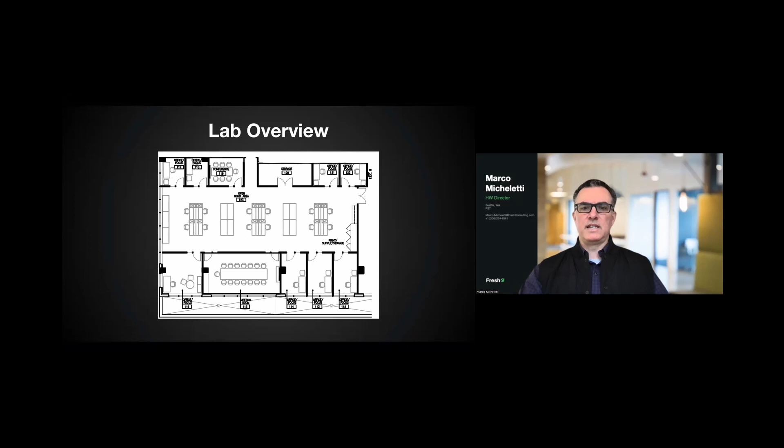Another one of our superpowers is we actually have a lot of capability around fabrication, small prototyping, and building in-house. We have a couple different options between our labs and shops with different capabilities. We have two labs at our headquarters that are about 2,000 square feet each, with benches and things like that. And we have a 10,000 square foot shop across the highway from our headquarters in South Bellevue, which allows us to do some pretty large work, since you need the space when doing mobile robotic integration on vehicle-size products or large automation work cells. So we have a lot of capability in-house, which also differentiates us from other folks in the area.

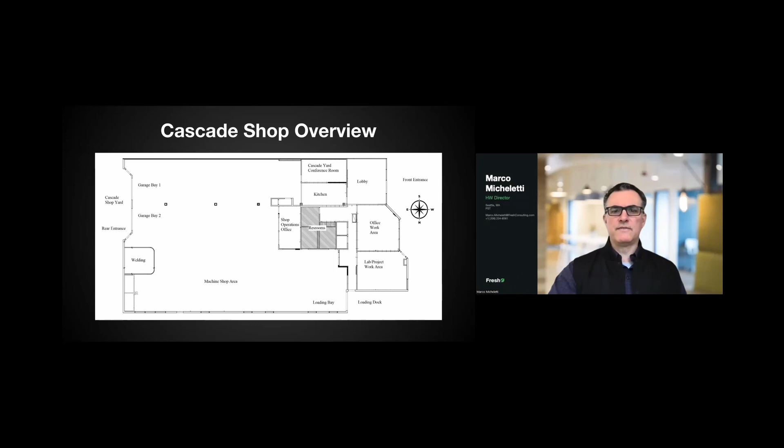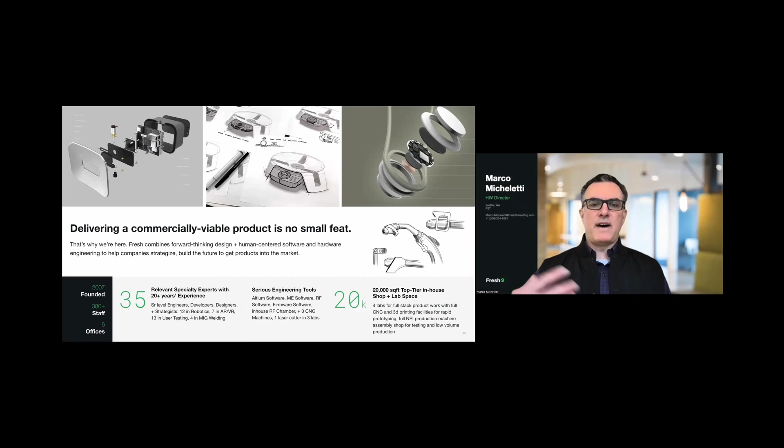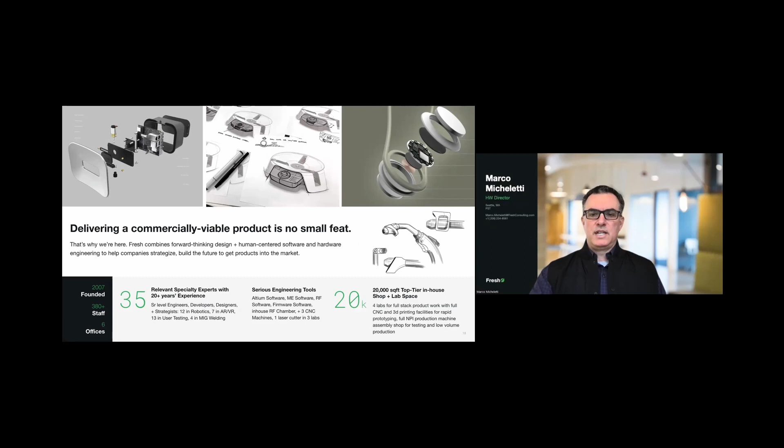So why do we do this? We're really interested in the purpose of product development companies, which is to help our clients bring commercially viable products to market. It's a really hard thing. Everyone's heard hardware is hard, but that's what we are. We're hardware developers with a lot of capability in a lot of different areas. And at heart, almost everybody on our team was that kid who loves to build and tinker and engineer. That's what we are at heart, and we love solving the really hard problems for our clients.

And we follow formal and organized processes around product development. We have some of our product development processes that we show. People have different terminologies for product development processes, but we follow that. We also publish quite a bit in the space of thought leadership, white papers that are on our site, always trying to look around the corner a little bit into the future, to show our clients and anybody interested a bit of thinking around new technologies and challenges going on in the future.

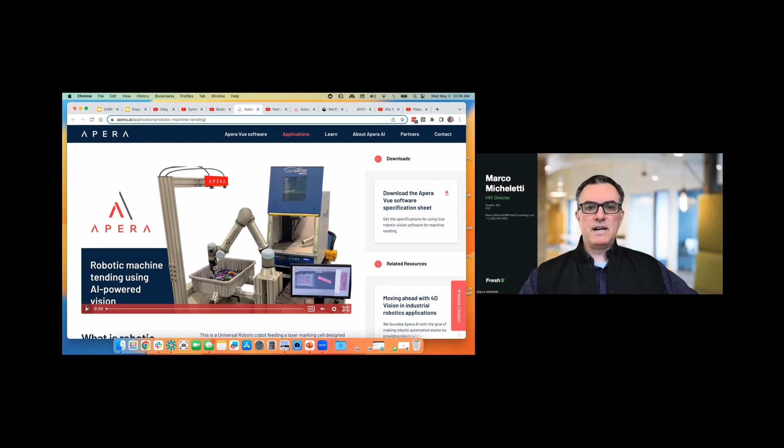A lot of these folks, you come in and you don't have to, say, use the traditional automation approach, which is like really controlling all the environment. The AI, the vision processing, is allowing the robot or the software to deal with the ambiguity of this bucket of parts over here. Where before you had to have everything really nicely lined up, you had to code it all very specifically for the application.

Now you have this, like, the two cameras up above - it's really simple hardware, there's nothing really special about them. There's like a PC or an NVIDIA type product that's not very expensive over on the side, and it's just really driving this whole thing. And so some of these applications of what you can do did take a lot of development and coding and investment up front.

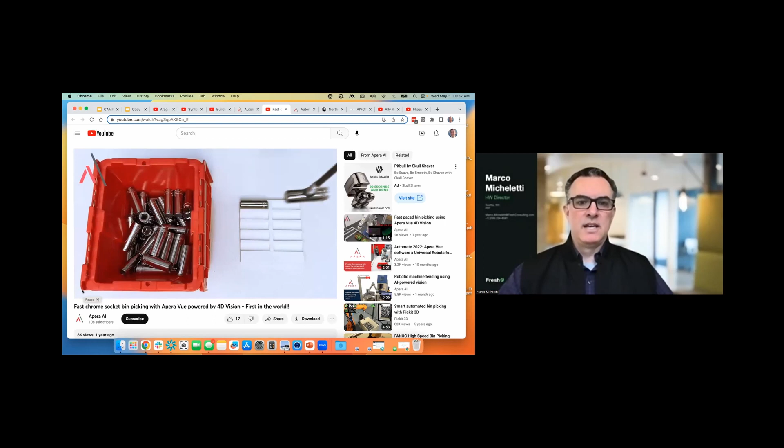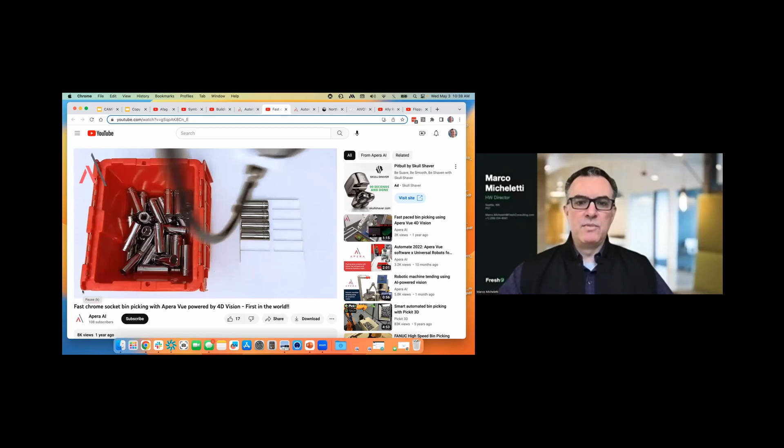And this is where the cost has come down by orders of magnitude. A lot of this is essentially, you do a little bit of training, and there's examples here where they're moving this around. This is happening essentially unprogrammed, real-time, open-ended running type robotic application.

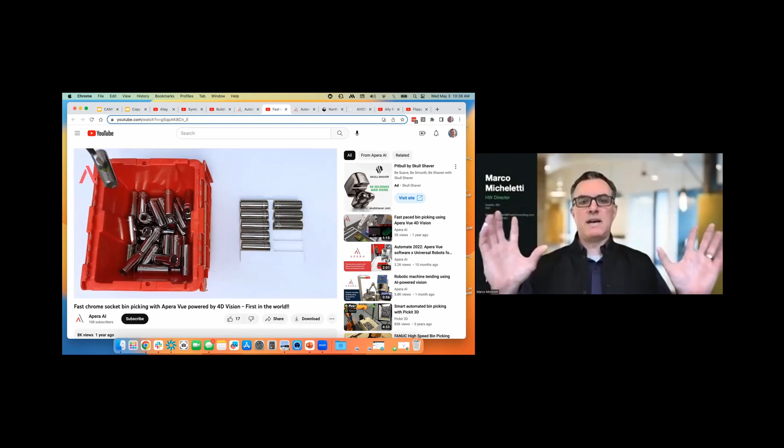This is dealing with, it doesn't know where the target components are, it doesn't really know where it's going. You could move it around and it'll find the right spot to sit it in. And this is really amazing. You can go buy this product, put it on one of your cobots or any other robot, and...

It just works. And these guys are saying it'll just keep doing this all day long and operate at night. You'll see it might drop a piece too, and you don't have to stop and clear it. I ran a factory where anytime something dropped and ended up in the wrong spot, it at worst shut the machine down or caused a crash that could have been tens of thousands of dollars. At best, it just stopped if it detected it, and you'd take some type of intervention. But here, it dropped, it missed, and it's like, it's okay, I'll just keep going.

This is the type of stuff that's happening now that you don't have to spend time developing. Someone's already developed it and they're taking these things out at scale. This is what's bringing the cost down.

The other side of it is the hardware side. Here's another example - this is our former director of robotics, Mitch Tolson, but he started a company called Ally Robotics, and they're really trying to make a low-cost robot arm. They're teaching it with hand controls, so you can just teach the points without needing to deeply program it.

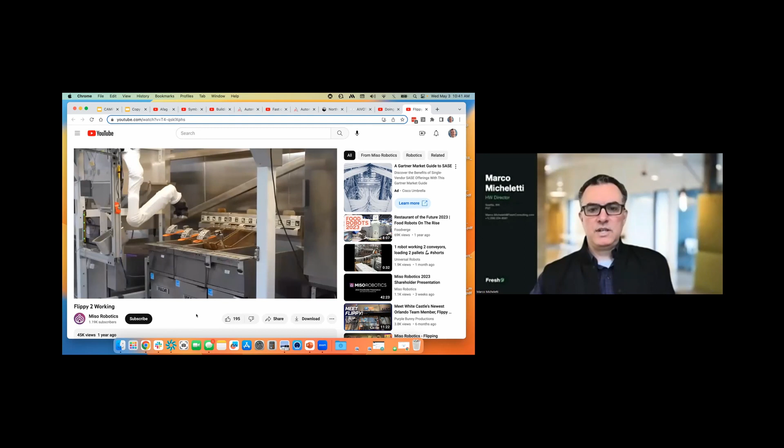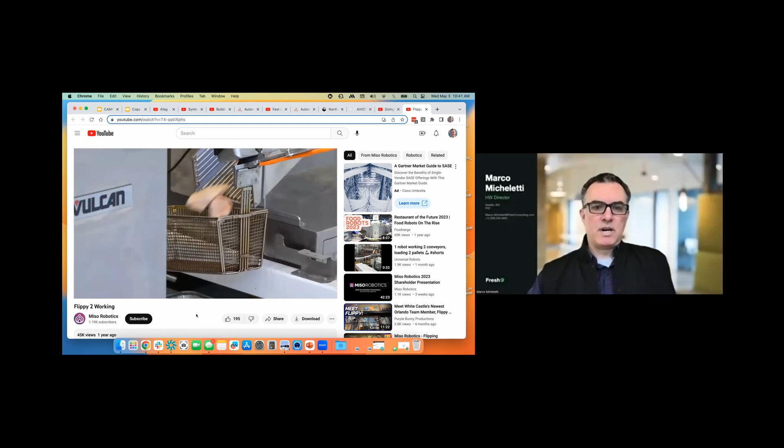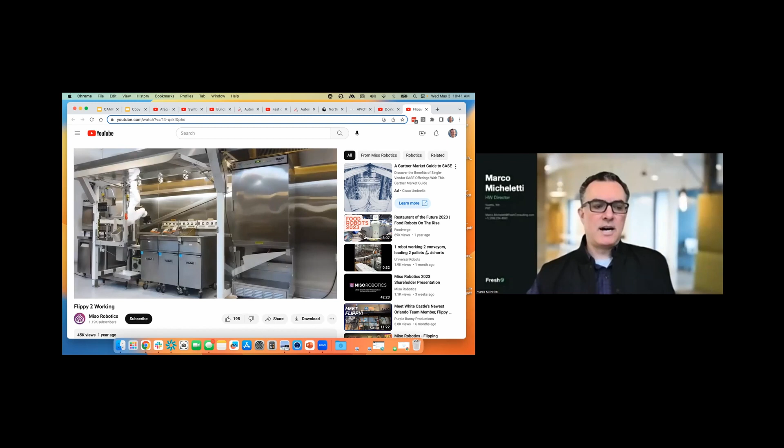So everything's coming down. Another interesting application of this is food service - this is deep fryers, a company that wants to address the fact no one likes sitting in front of the deep fryer, and this is a company that we've worked with. Creating the robot arm, the system to be able to monitor, do all the things you need to do, but also do it economically. The low cost arms that Ally are making are in partnership with this company so that they can address the cost of installation for all of these things.

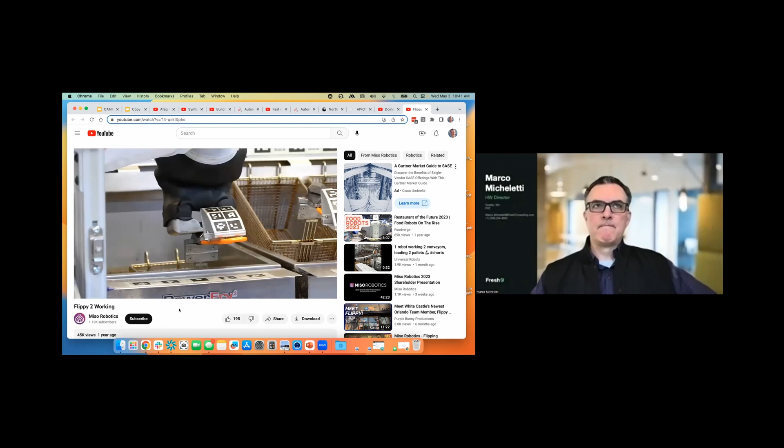Now again, when we talk about the camps community, we do need to be very specific and really think about how to solve the right problems so that automation doesn't get too expensive. And for the opposite end of the spectrum, this one right here.

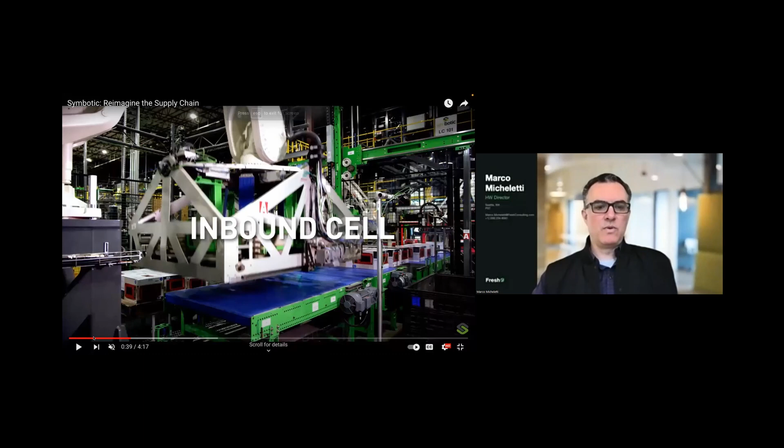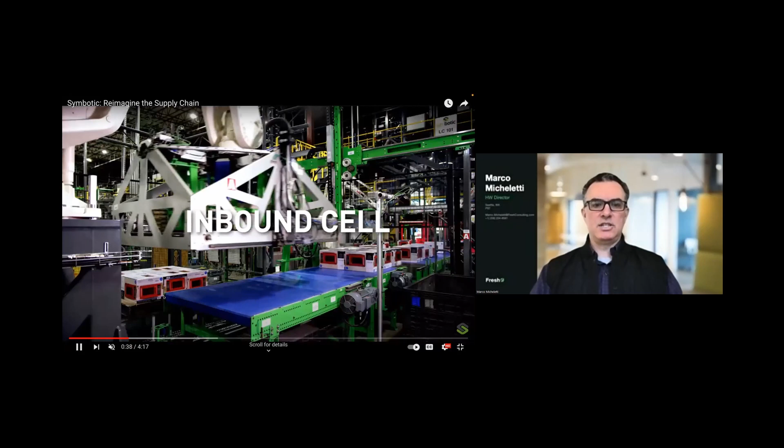This is a mega distribution center, a place I actually went and saw working in person. They take pallets of products from Procter and Gamble or anybody, depalletize them, store them in a huge cube, and then as stores or people bring their orders in, they build them. This is the inbound process - destacking and ingesting pallets of the same product, storing them away.

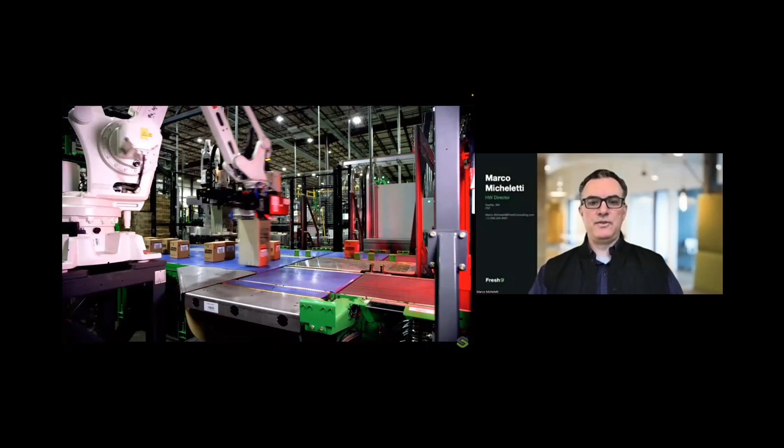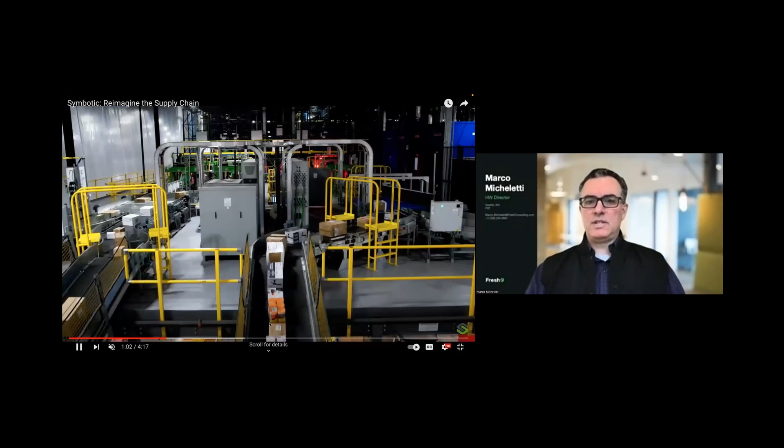And this is real time. These are huge robots processing tons of stuff in a 1.2 million square foot... we're talking a large consumer goods distribution center. But what they're able to do is when they're building their orders for pallets that go out to the stores - let me see if I can forward along to this - this company is called Symbotic.

This is the racks where they're stored, so they can store things more densely. They can retrieve it - they have a number of different approaches, though a lot of the solution is still a little bit brute force, robots going back and forth. But the fact that they can do this - I'll talk about the efficiencies of what they're driving.

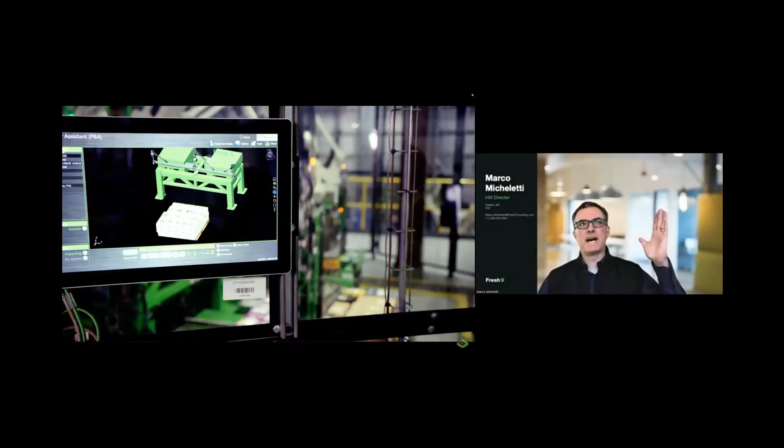It's amazing, the company pledged $13 billion to automate all of their distribution centers in this way, essentially from unloading the back of a truck to loading the truck with a new mixed pallet. These robots, the AI, the computer system can look at the orders. There's a couple of things going on here, which is amazing.

They can build the order for the store so that when this pallet comes off the truck, they know the things on top are going to go to aisle 1. As you go down the aisle, they'll put it on the shelf, and as you go to aisle 2, the next thing. So they build the order in a logical sense that's efficient for restocking the shelf.

But also you see it's stable and more dense than anything a human can actually do. So this is where the computer, the AI, or the optimizations they can make based on the order really come into play.

This is more of an industry leader, and what they were able to do is understand their costs and operations so well that they know every time they touch a box, it costs 50 cents - to put it away, to put it back on a pallet, to take it off the pallet and put it on the shelf. They were able to build their ROI, essentially saying we can invest $13 billion and cut our touch cost in half. What enables it for them is that they're doing something like 500 million touches a day, so the ROI was there.

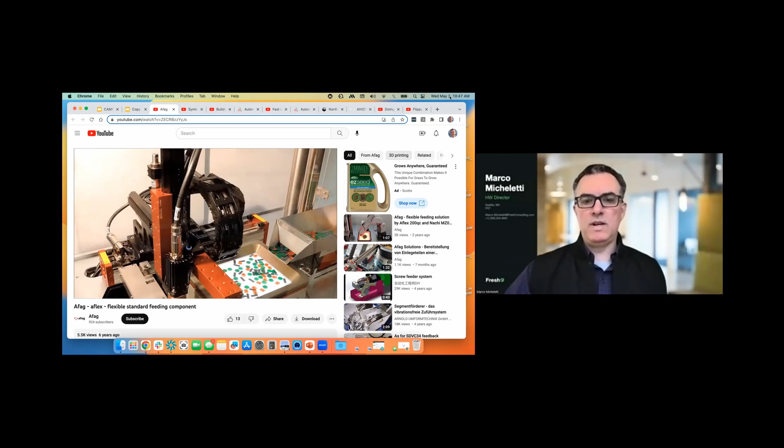We had an application where we literally had three different washers that differ in diameter by 2 or 3 millimeters each. But we said we don't have to worry about putting them on spindles or sorting them really precisely, because it's at the detection level of the camera systems along with the AI - we can measure them to within a tolerance that we can always pick the right one.

So that's a place where sorting, placing into packaging, labeling - applications like that which become very monotonous for people to do, but are great starting point applications for folks in the community.